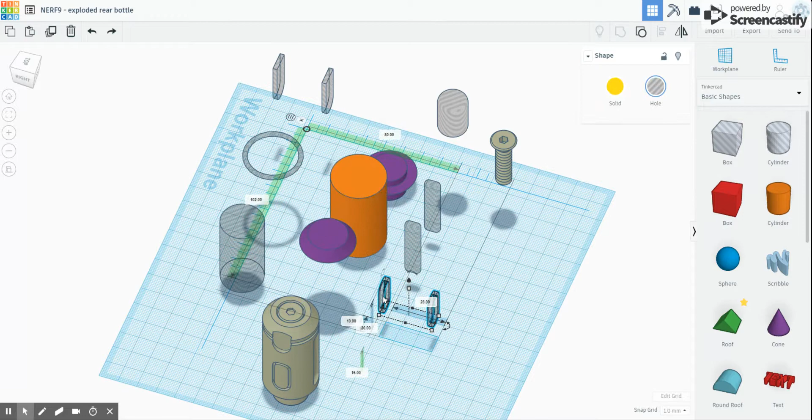To give it a little bit more of a relief, I'm going to fit some of these to it. Now, these are soft boxes. If I ungroup those, you'll see just a couple of soft boxes placed vertically.

Nothing much to them. If we join these two together, I've spaced them out so that they're going to be the same diameter as this little cylinder that we've got here. So if I group those together and turn them into a hole...

We'll just put those there, and leave them at the moment. We don't have to center them yet because I'm going to do a group center later. These little shapes here are kind of like a bull nose cutter run down the side of those.

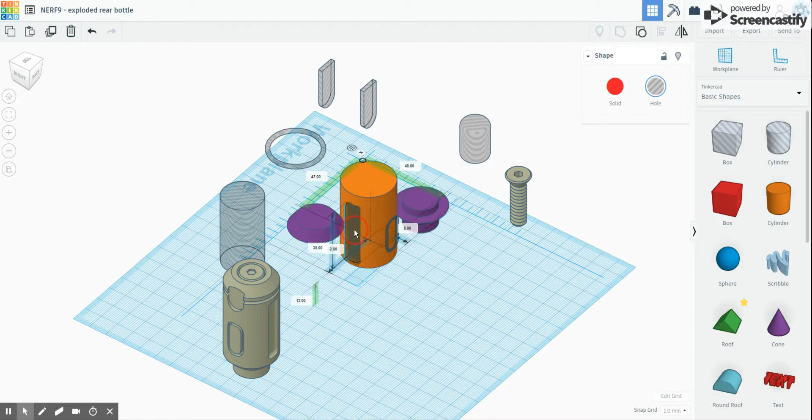They're basically just the box shape, but again with bevels, and they're spaced slightly wider so that if we put them here, you'll notice they actually stick out a little bit from the side of the box.

Now, one of the other nice little features you can put on these kinds of things to make them look a bit more realistic is this kind of groove that you get going around at the top. So here we've got a little groove, just a little shape we've got here.

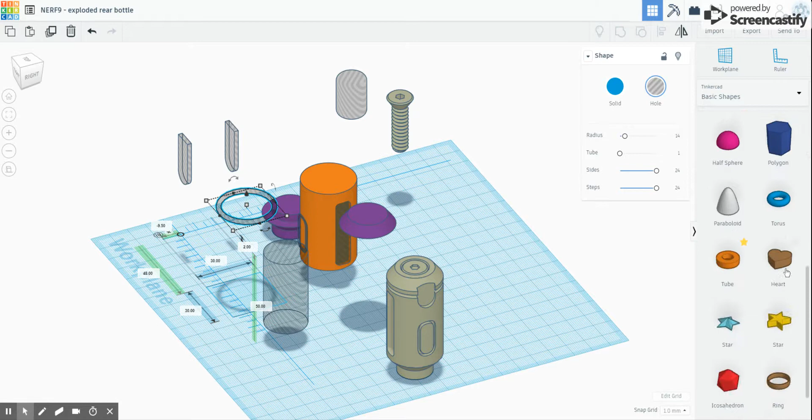It's one of these little toruses, and it's got lots of sides on it, so it's nice and smooth. Again, we'll put that around about here at the top, not too worried about the centering at the moment.

Now, if I just do a quick view up here at the top, I'll use this align tool. If I select all of those shapes together, you can either click on it like that, or I like to press the L button, which gives you the thing nice and quickly. We'll do a little align in the center that way, align in the center that way.

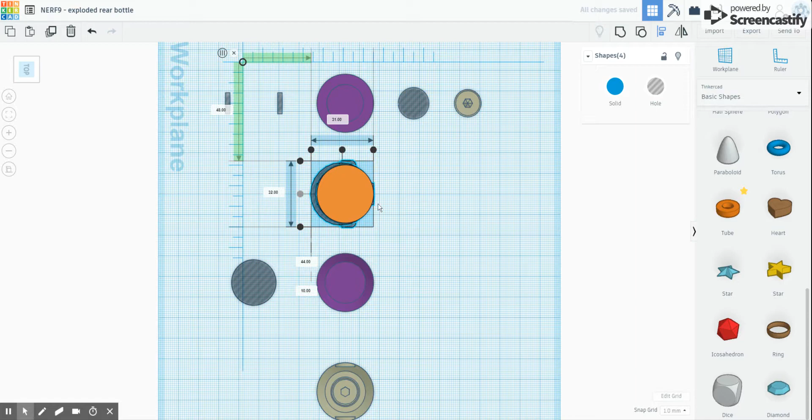Might do it a couple of times just to get everything to go together. Here we go, hang on, one more. There we go, that's better. Now group that together, and in one hit we've got the little section out the side, and little grooves down there at the top.

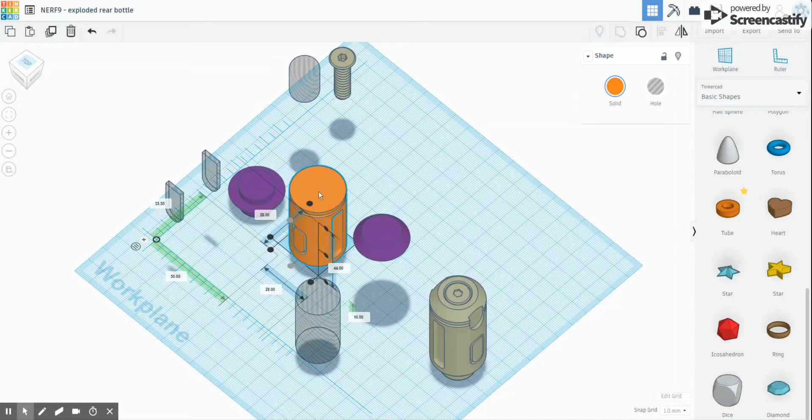Now we need a top on that, so we're going to put this on, which is a truncated cone. There's a little, if I scroll up to the cone—just this one, one of the basic shapes—but you can put a top radius on it so that you don't have the great big point, of course.

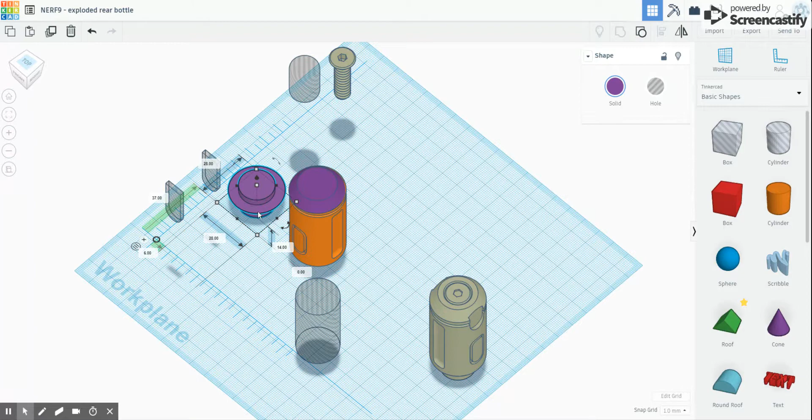One of the things I made a little bit earlier is basically a cylinder, another truncated cone, and it's actually got a square hole in the bottom of it so that it fits on a peg on the gun. We'll move that into position there, and again we'll line up all three of these items, like so.

Center and center. There you go. And we'll group those together.

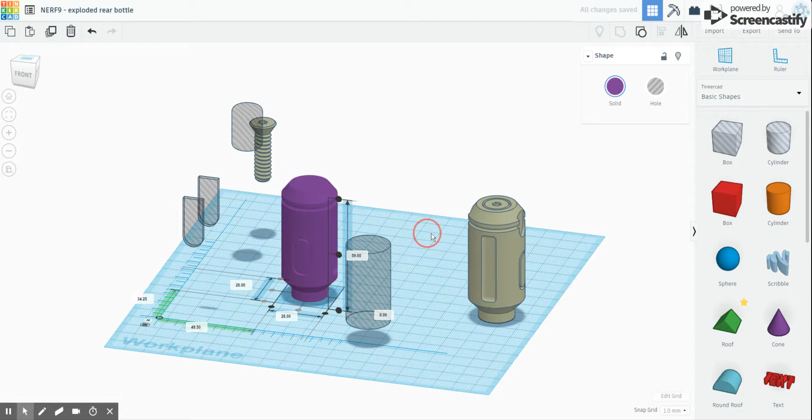Now one of the other things that makes it a little different is this strange cutout, which you can see on the side there, on the top. What I'm using for that is, if I ungroup these—I'll have to ungroup them twice. The first ungroup is that, the second group is this one. And what you can see here is we've basically got a thin round roof, one of these semicircular shapes with just a little box section on top.

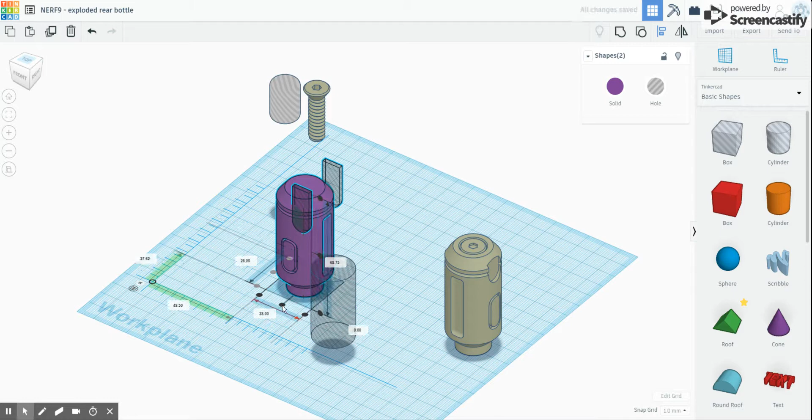So if I group all those back together again, turn them into a hole, place those on the side, like that, align, realigned—yeah, there we go. Group those together and you get a nice little cutout that actually passes through several pieces there. So there you go, looks like quite a nicely machined little add-on to that.

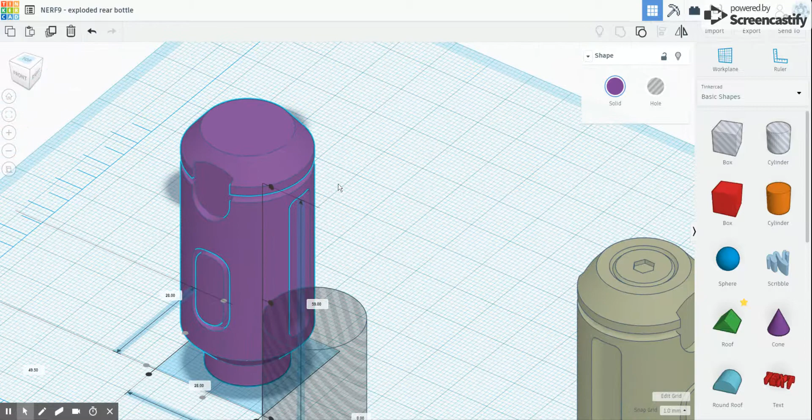Now one of the other things I want to do is put this sort of screw detail in the top. On Thingiverse you can find loads of screws and widgets, and so we've got one here. It probably started off life as some M8 equivalent, but we've moved it around a bit.

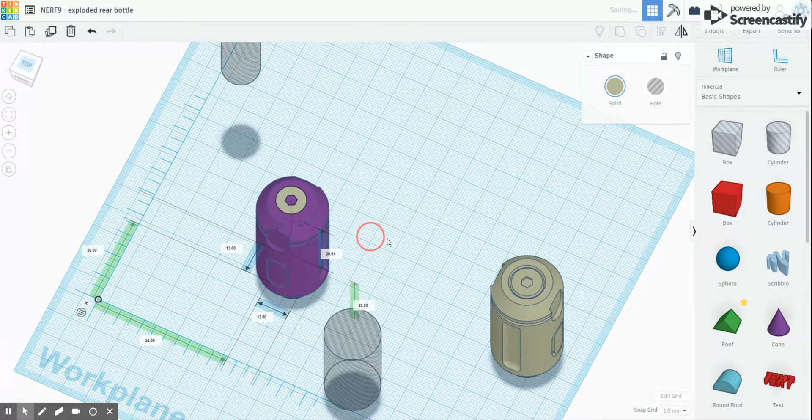One of the things we're going to do here, to start off with, is just line that together with this. But that's going to lose some of the detail—it's not going to stand out so much because it's flush.

So what I'm going to do here is, first, just hide that. And then I'm going to put a little dish in the top. Here we've got a cylinder which has got a bevel on it, and lots of segments, so it's nice and smooth. We'll put that in the center.

Now we've got that thing that's invisible at the moment, sitting in the same place. So what we'll do here, when we align, is one of the things I like to do—stop the base moving. You can do an align like that, and then back to the center. Group those together, and if I now do a show all, that'll bring back the hidden element we've got, and it's still in the same position, the center.

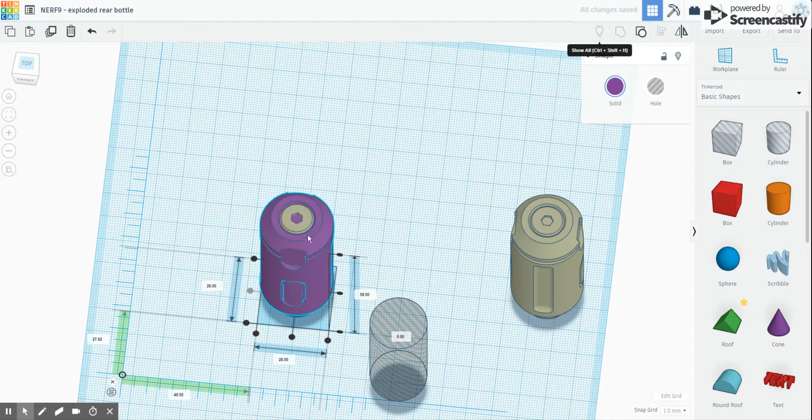So we can then just group these two together, like so. And then I'll probably change the color on this, just on the display, to make it a little bit more visible for what we're going to do. So I'll do white for this one.

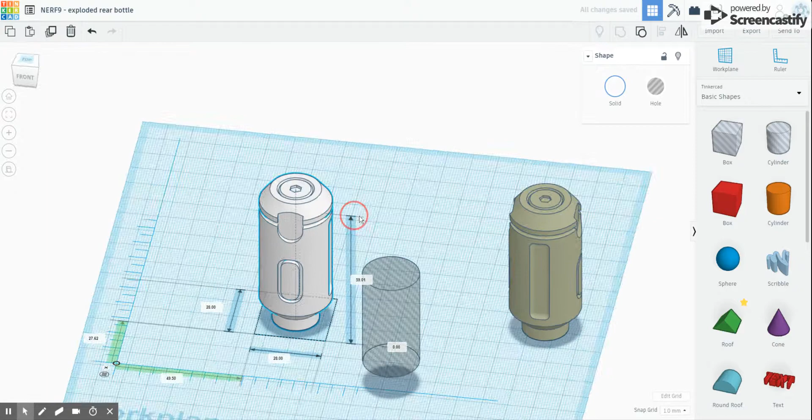Now we could just print that out, of course, but we're going to be a little bit frugal with the filament, and also to keep the weight down on this sort of thing—we don't want it bouncing around at the back. So we're just going to put a hollow cylinder, put that in the middle somewhere, like that.

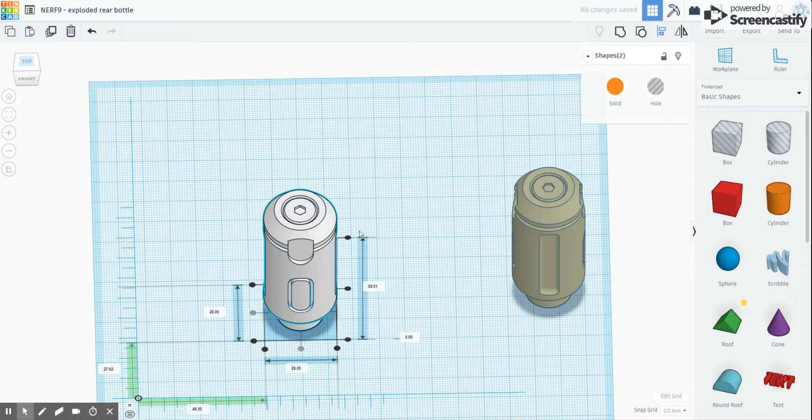Do a quick align so we know it's in the middle, and that's also going to take the bottom of the screw out as well, so it's not dangling down in the middle if you were trying to print that. So it's best to put your hollowing-out objects in last.

We'll do that, and if we just do a quick view on that as transparent, you can see roughly what's going on inside. So there you can see the hollow, and it hasn't affected the peg because the peg only comes up so far. And that is an alien-looking rear bottle plug for the back of your NERF.